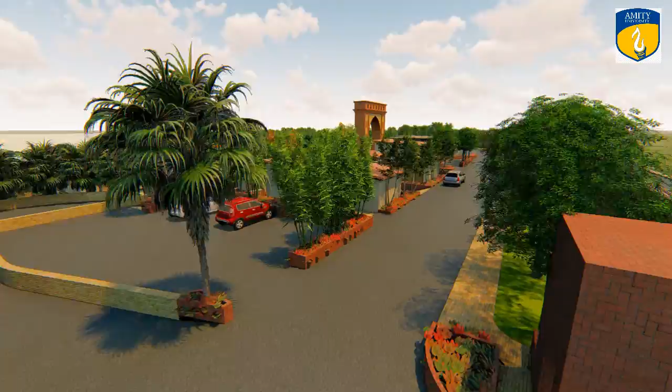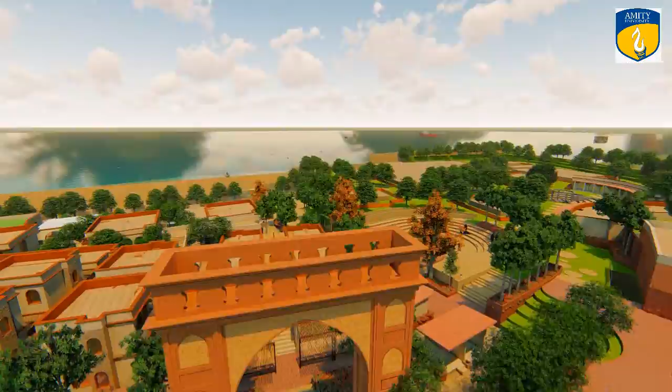My thesis project is about an artist retreat in Varanasi. The city being a hub of art and culture, I thought to develop the art village in the oldest city of the world, Banaras.

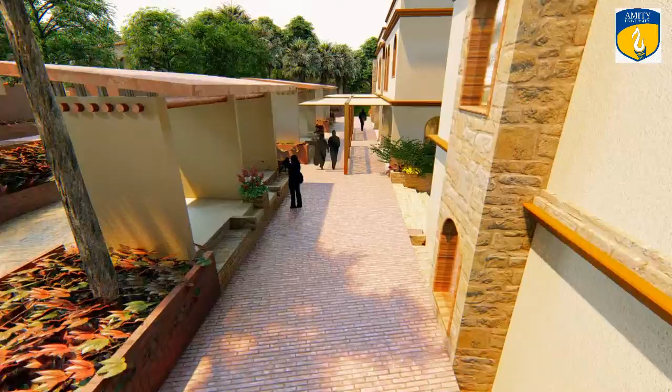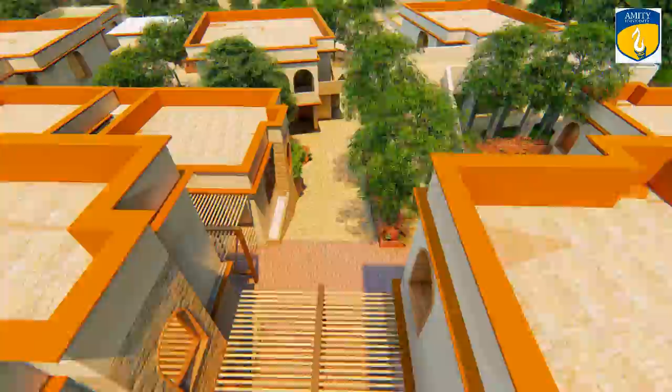The idea of an artist retreat is based upon the basic needs of an artist that they experience missing around them. Here, artist refers specifically to visual artists and craftsmen for this project. By artist retreat, I mean artist in residence — a residency for artists outside their usual environment, a place where artists are provided with residing and working space and are set to various activities.

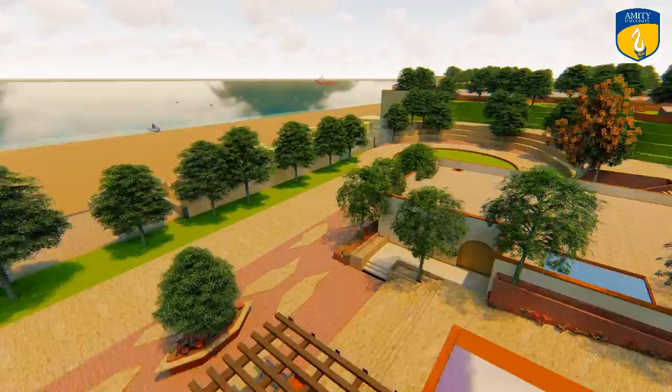The project is proposed to bring up opportunities for local and visiting artists in the country. The whole land is envisioned to be covered with artists and artworks, creating a more cultured environment all over the site, escalating interaction and learning experience.

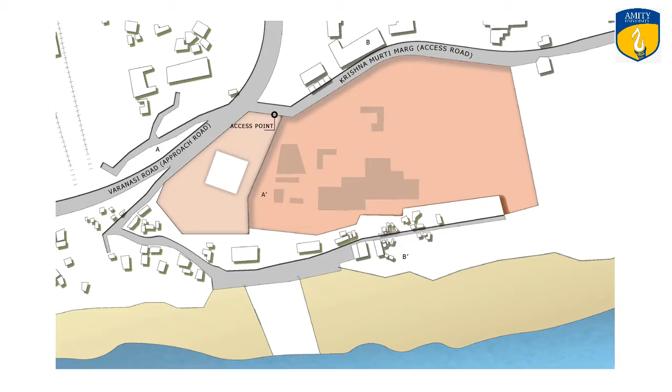The site is located in Uttar Pradesh in the city of Varanasi, towards the northern part of the city known as Rajghat. The site is an ASI excavated land with a tomb adjacent to it, shown in the white square, and a few excavated remains — 2 feet high walls represented in dark muddy color. Adjacent to the site, Kashi station is 700 meters apart.

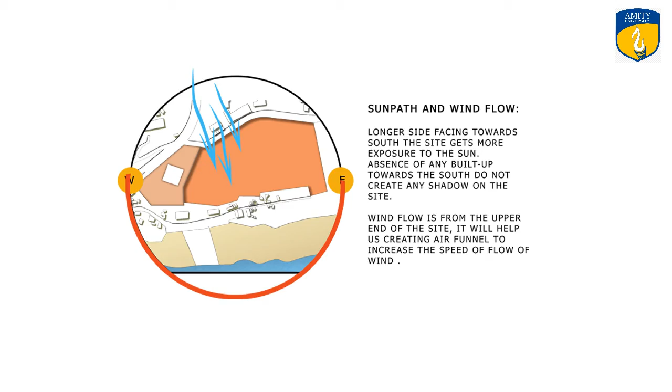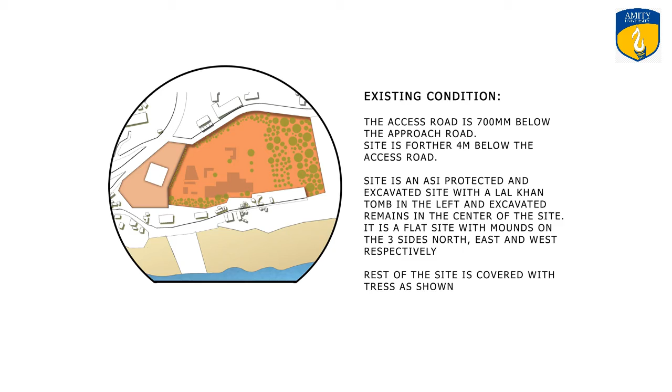Sunpath diagram shows a larger area exposed to light. For approach, green represents the approach road and yellow represents the access road. In the existing condition, half of the site is covered with trees, shown in green on the right of the site. The section of the site depicts flat land with slopes on two sides.

The concept is to incorporate tangible and intangible characters of Varanasi on the site to create a similar environment as Varanasi — tangible characters like Gali, Ghat and Ganga, whereas intangible characters like bells, prayer chanting, and community gathering spaces.

To bring up the characters of Varanasi, 5 major parts of the site have been divided into levels. First, the road and studio at level plus 200. Second, the excavated area at level minus 3000 mm. Artist gully at level minus 4000 mm. Craftsman village at level minus 7000 mm. And admin and ghat at level minus 10,000 mm.

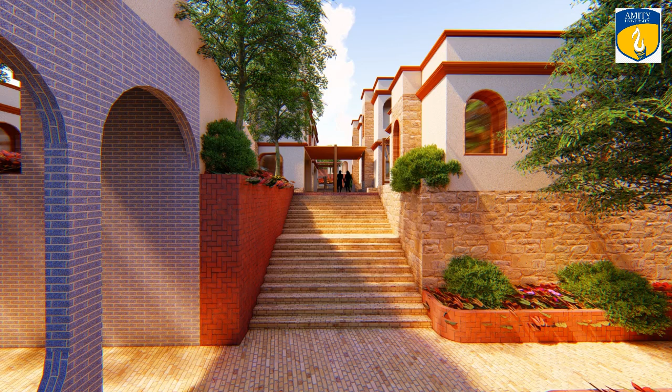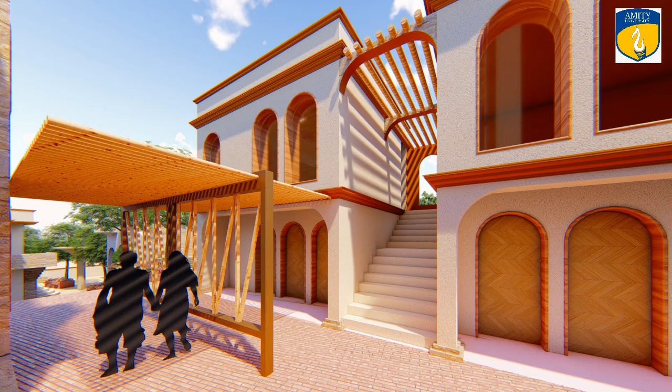To bring up the feature of the gully of Varanasi, the pedestrian movement over the site has been formed and planned in the form of gullies, moving through the artist residences, showcasing artist artwork, and creating community gathering spaces all over the site. The site has 2 entries.

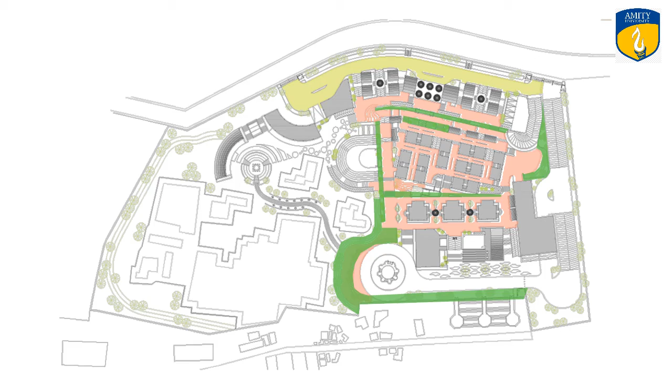The first is the main entrance and the second is the service entrance. Vehicular movement is limited to the front of the site, whereas pedestrian flow is in the form of gullies all over the site. Green alleys divide the 5 major levels through greenery, slopes and stairs.

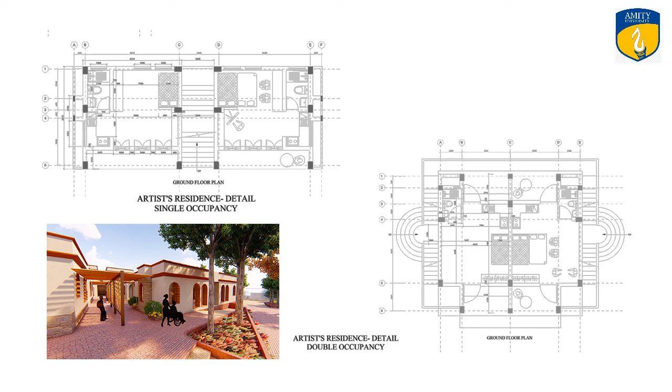Following are the detailed layouts of the artist residences. First is the single occupancy residence, and second is the double occupancy residence. All the layouts have been done according to anthropometrics.

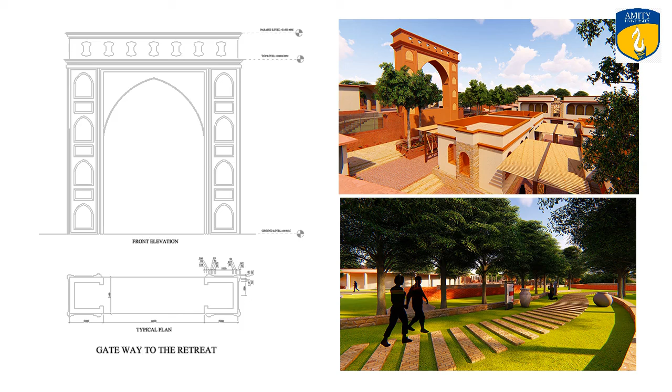The administration block: the ground floor is the admin area, while the first floor is a cafe overlooking the Ganga. The gateway is placed at the entrance of the site to create a sense of welcome for the artisans and visitors. Following are the major site sections.